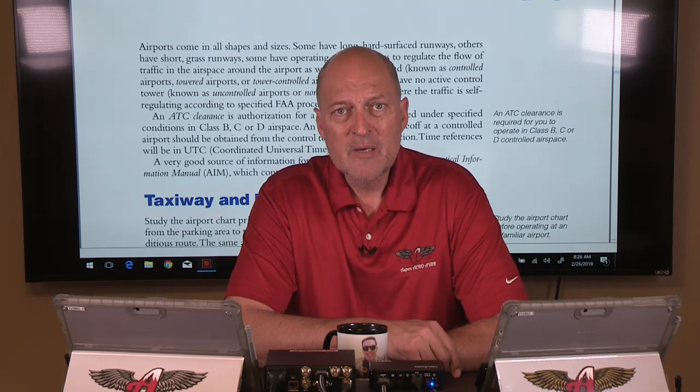Number one, after Friday, I hope you guys believe me when I said it was important to understand this book and to understand what is where. It's kind of the old adage about being an attorney - it's not necessarily what you know, but what you can look up. It's the same thing here: one of the things you're responsible for as a pilot, when flying from one place to another, is being aware of all information having to do with your flight. Parts of that have to do with airports, airport configurations, runways, frequencies, things like this. That's where you get this information in advance, during your planning phase, so that you can make good decisions. That's what this is about - it's about helping you make good decisions.

So you found the definitions part in here, because so many of the definitions and abbreviations are used to make this guide half the size it normally would be if you actually spelled out all the words. That's one of the reasons they abbreviated, to make these a little bit smaller. And you're thinking, okay, smaller - well, that's part of it. So that's one of the things you have to be aware of. In addition, you also have to know the information for each airport, using the legend at the beginning of the book to understand where all of that stuff comes from. So that's the big part of it.

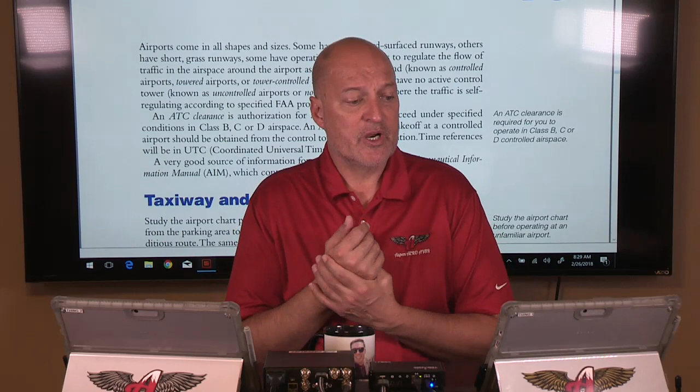Okay, so now then, without further ado, we're going to press into airports and airport operations.

Oh, by the way, your next quiz is going to be over chapters 12 and 13 - that's your next quiz, so just letting you know. Remember, in chapter 12, all of those maps, all of those things at the end of chapter 12 that I told you you were responsible for, all of those text windows inside each one of those little figures and legends you see at the end of chapter 12 - you're going to be responsible for those. Guys, you've just got to go over it, you just have to read it.

There you go. Okay, into airport operations, because at some point the assumption is that you're going to take off from somewhere and land somewhere, and hopefully those somewheres are going to be airports. So there we go. Pardon me whilst I sip.

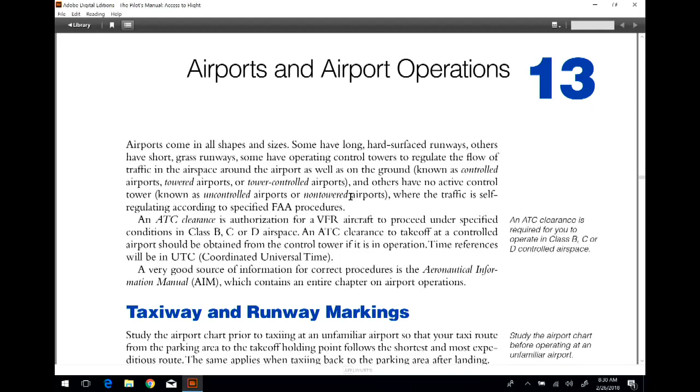So again, as we looked at in the sectional maps, we know that there are towered airports and non-towered airports, shown with different colors on the maps. And you have to understand what those are for, understanding the different types of airspace.

Because you have things like Aspen, which is Class Delta airspace at certain times, and Class Echo airspace at other times, because it says so right there in the chart supplement guide.

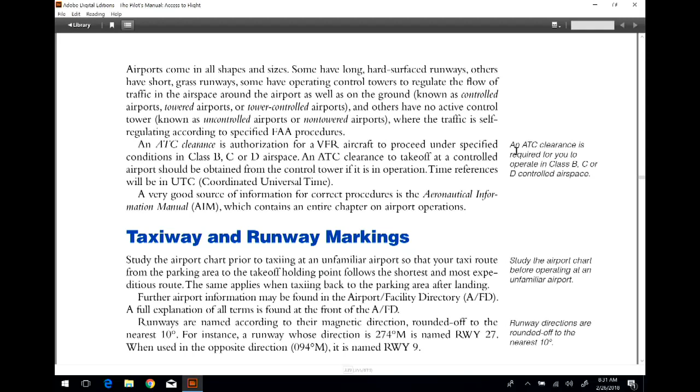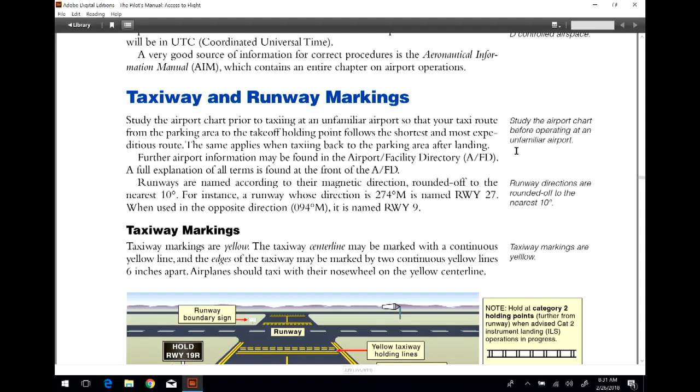We look at these here because now we're starting to look at the airports themselves, taxiways and runway markings. You can see different things going on with regard to taxiways as well as runways. On taxiways, you're going to have yellow lines on the sides, and the lighting you'll find on the edges of taxiways will be blue at night.

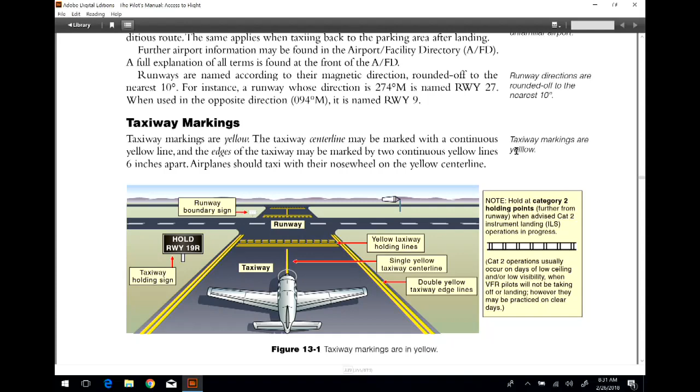All of these markings, all of these things that you see here, you're going to get tested on, because you've got to know what you're looking at with regard to airport operations and driving an airplane around on the ground when you're out there.

This look familiar? If you look right there in front of the FMX, that's called our hold short line. That hold short line requires an airplane to stop every time they're on the solid side of that line. So when you're on the taxiway heading to an active runway, you stop here and get permission to cross.

It's the same way we have in the classroom - that's why those lines are there. You have to have permission to get in the FMX, you've got to have permission to go around the big bald man's desk. So that's why the hold short lines are there on the floor.

When you're coming off the runway and onto a taxiway, you come off the runway and go past the hold short line, and stop again on the solid side of it. The two solid lines, you stop every single time. The only time you wouldn't is if ATC gave you clearance to cross.

One of the things I always do is, if it's not real busy communications-wise, I'll always double check before I cross and just check with ground control to make sure I am cleared to cross that line before crossing a runway. If they give you permission to cross the runway, you can cross it, but I always like to check if it's not real busy on the ground channel.

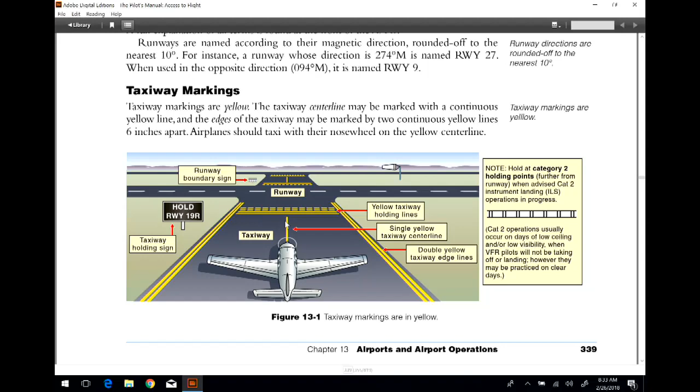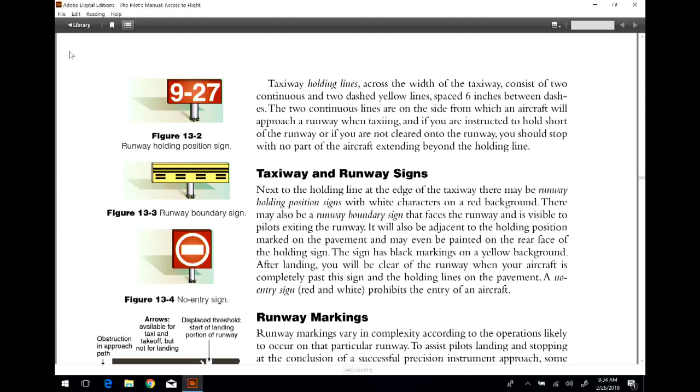And here we also have signs for the runways. A red sign with white numbers indicates that in front of you, you're going to see runway 9 on the left and runway 27 on the right. So if you taxi down to the right and then turn back to your left, you're going to be taking off on runway 27. If you taxi down to your left and get onto the runway there, you're going to be taking off on runway 9. The hold short lines here, that's what those mean.

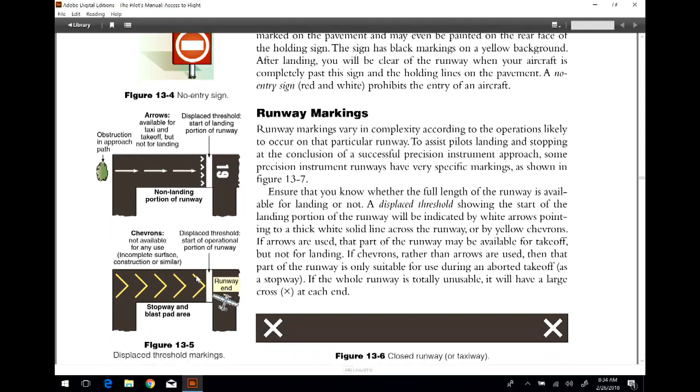No entry signs, pretty self-explanatory. Then in figure 13.5, you'll notice here that you have a displaced threshold. Here you see what is traditionally the beginning of the runway where you see the numbers, but now you see this thing with arrows on it. Well, the reason they'll do a displaced threshold on the runway is...

Let's say there's an obstacle and they want to keep your glide path well above whatever that obstacle may be. So what they'll do is add an area here of displacement that allows you to land while clearing whatever obstruction may be in your path. You can also think of this as the non-landing portion of the runway - they don't want you to land there, but can you use it to taxi and perhaps take off from it? Yes, you can.

So just like in Aspen on runway 33, if you look at your chart supplement guide and the airport diagram, you will see a displaced threshold on runway 33.

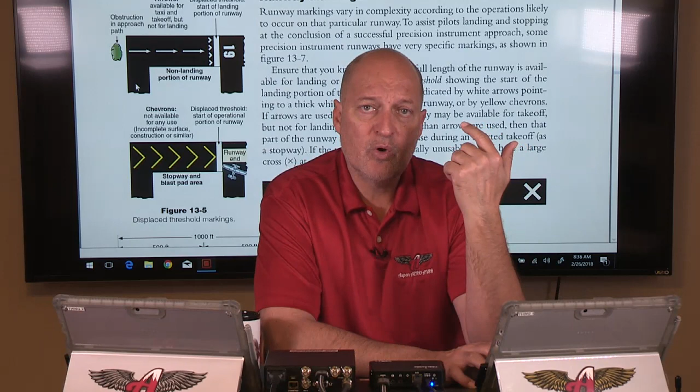Take a look at that on your own, and you can see what we're talking about there with the displaced threshold. It gives you, in essence, almost another 1,000 feet to take off on runway 33, but you can't land on that portion. Coming back the other way on 15, you can also use that extra 1,000 feet as an overrun if you need it. Chances are you won't, because you're going uphill there anyway, but you can if you need it. That's one of the things airports do to keep operational safety in check, but also give you extra room to use as needed. So this is a displaced threshold.

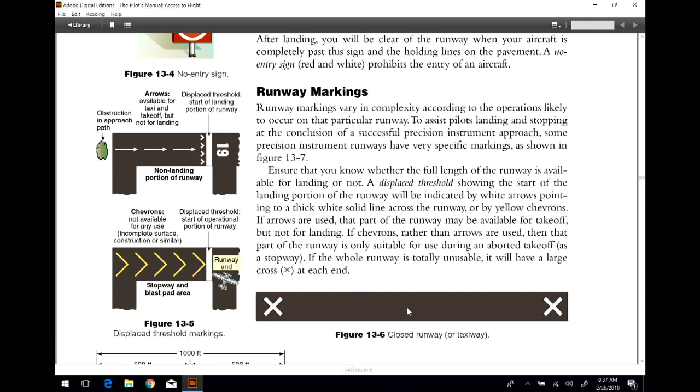Here again on figure 13.5, you'll see these chevrons. A chevron is kind of like a little arrow, but they're full across here, so they're V-shaped things, and they're yellow. There are no operations on the chevrons - nobody uses these except as a blast pad area or safety overrun coming the other direction. The runways here with big X's on them mean they're closed.

Okay, 13.7. This is one of the things you're going to see on most runways that have ILS approaches. A lot of the big commercial airlines will use these markings for the fast movers, the big boys. But we also use these as little guys when we're flying with instruments.

So here we can see the threshold marker - a lot of people call these the piano keys. Then you'll see the runway marked 20 left. That implies there are parallel runways here, because if you have one marked 20 left, the assumption is you also have a 20 right, and you could also have a 20 center. So there could be as many as 3 parallel runways - left, center, right.

Here's the numbers, and they appear in the first 500 feet of the runway. Then at 1,000 feet, this is what they call the aim point marker, or what we refer to as the 1,000-foot markers. The reason we call them that is because they're 1,000 feet away from the threshold markings, the end of the threshold markings of the runway. Cleverly enough, that's why we call them the 1,000-foot markers.

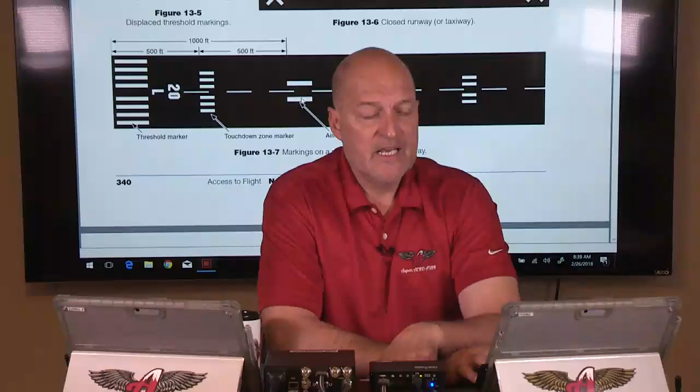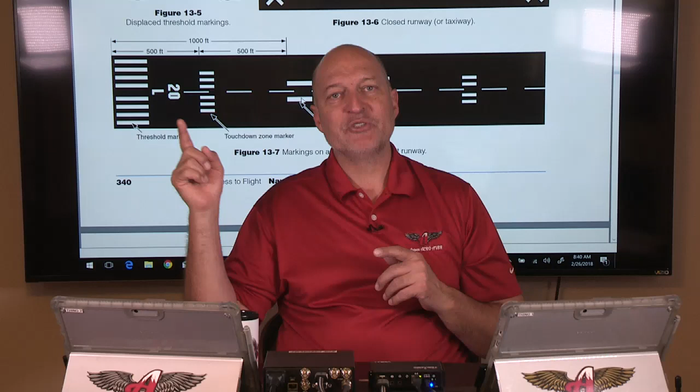One of the things that happens on a transition standpoint is that, for instance, when you're looking at the threshold, a lot of times on VFR stuff you're looking right at the numbers, and your instructors will have you use that as kind of your visual approach when you come in to land. Sometimes it's hard when you're practicing and you go from VFR to instrument stuff to actually take your focus to the 1,000-foot markers as opposed to the numbers, because you start looking at the numbers and coming in to land on them. Well, your VASI and your PAPI will tell you that you're low, because you're coming in at a more shallow glide point than you would have if you'd hit right at these 1,000-foot markers. So that's just letting you know what's going on.

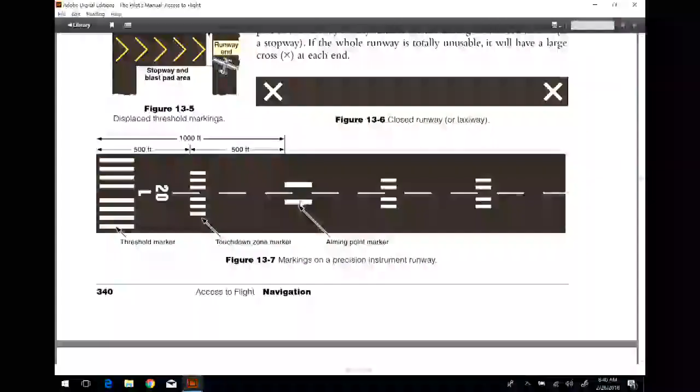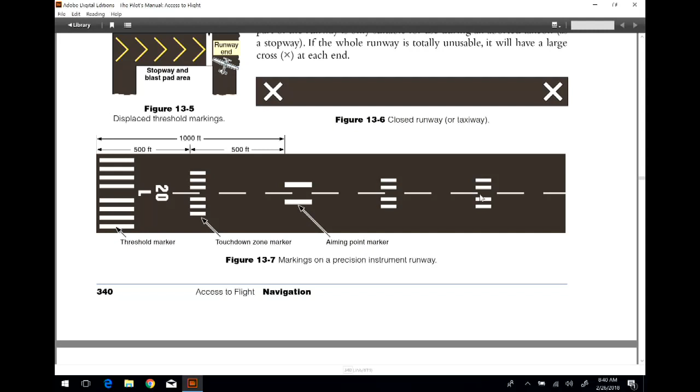You can also see here that you have these other smaller markers every 500 feet - one at 1,000 feet, 1,500 feet, 2,000 feet. And remember, based on your reading, you do need to land within the first third of the runway.

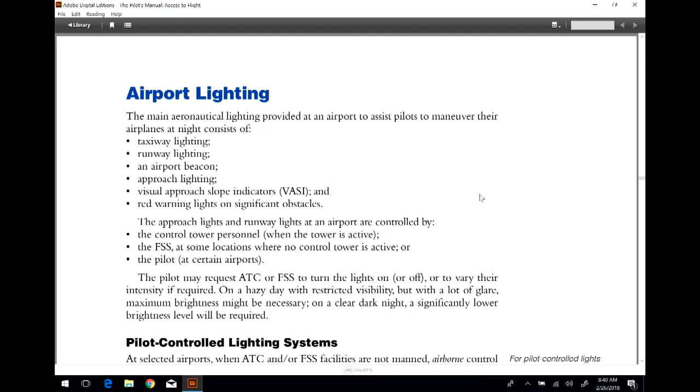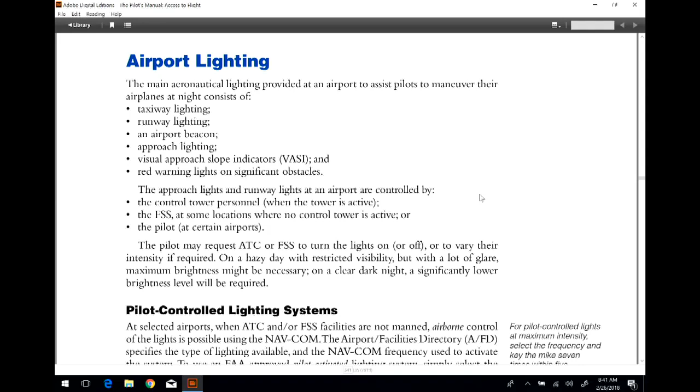Airport lighting - you can look at this here, and one of the reasons we have different colors of lighting is so it can aid pilots in knowing exactly where they are. If you notice you're taxiing between lights that are blue, you're on a taxiway. If you're taxiing between a bunch of lights on the sides of you that are white, you're on the runway.

Pilot controlled lighting. How do we use it? We use that so that at non-towered airports, or airports where the tower closes at a particular time, you can dial up on your radio either the Unicom frequency or the Common Traffic Advisory frequency. It'll tell you in your chart supplement guide what frequency to use.

Keying the mic means pressing the button. When you're on the right frequency, the Common Traffic Advisory frequency, pressing the button 7 times puts the runway lights on the highest illumination setting, so they'll be brightest. 5 times goes to a medium setting, and 3 times goes to a low setting.

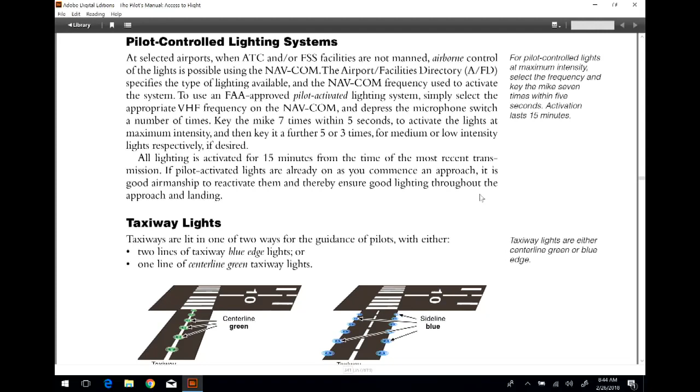Looking here again, you can see the taxiway lights, as I mentioned before — these are going to be blue. The center line of some taxiways can be green.

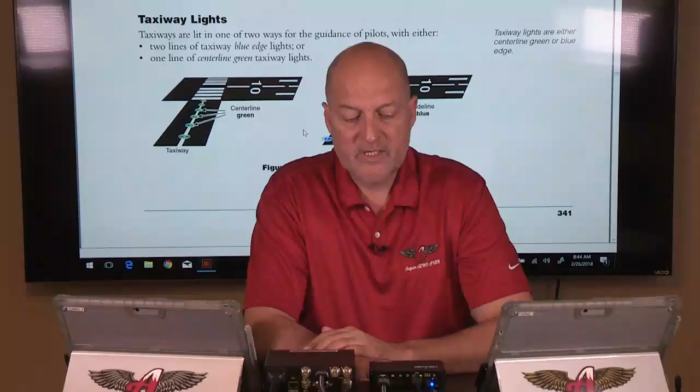One interesting thing, from one of the XED courses we went on a couple years ago to Ohio, is that we actually got to go out onto the airport runway at dark in vans. The Ohio State University was testing an in-ground lighting system. When you're talking on ground control frequency, they can give you progressive taxi instructions, calling your turns and helping you, which is helpful at an unfamiliar airport.

They were experimenting with in-ground LED light panels that show a green light, and the pilot follows this green light off the runway, onto the taxiway, and around to get to where they're going. So they basically use the lights like a follow-the-bouncing-ball system, giving visual progressive taxi instructions instead of just audible ones. It was really cool to see.

At some airports they do something similar to that, so look for that coming up at an airport near you.

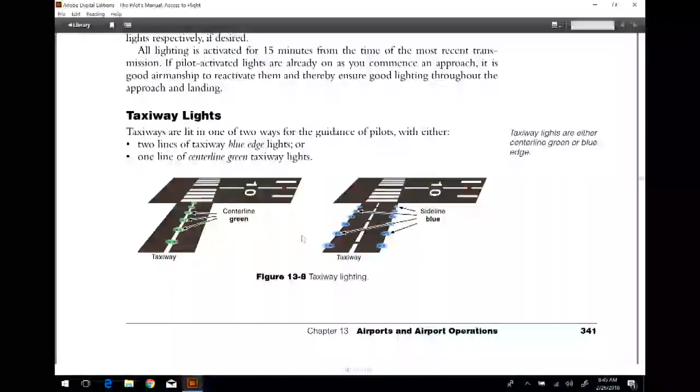We can see here at the threshold, we have the green lights on the approach end. At the departure end over here, you've got the red lights, side white lights there. Runway lighting, you can take a look at this.

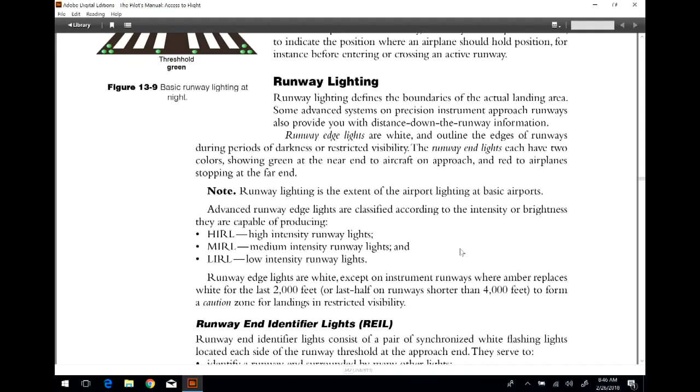HIRL, MIRL, and LIRL, you can also look those up in your chart supplement guides now that you know how to use those. REIL and RAIL, you'll also remember that from your chart supplement guides. Your touchdown zone lighting, remember that we want to be here in that first 3,000 feet in the landing touchdown zone area. Runway center lighting here.

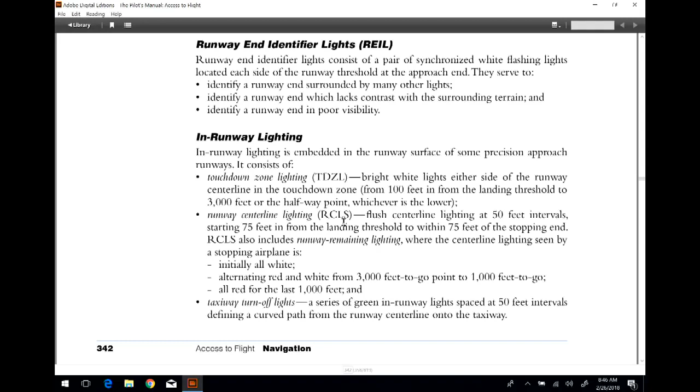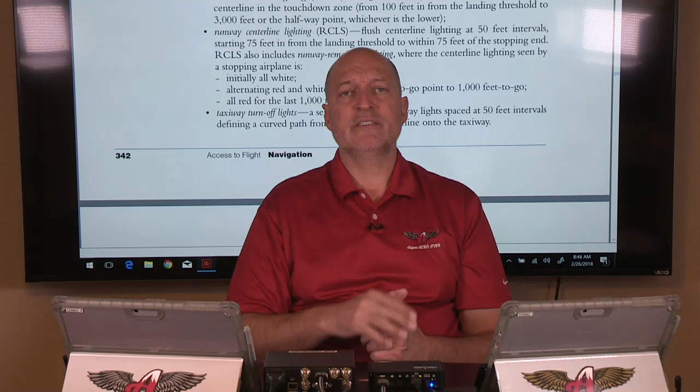One of the things is that when you land at a big airport, for instance, I think of Albuquerque and runway 8 and 26, and it's a big long runway. It's over 13,000 feet long, so it's pretty sizable.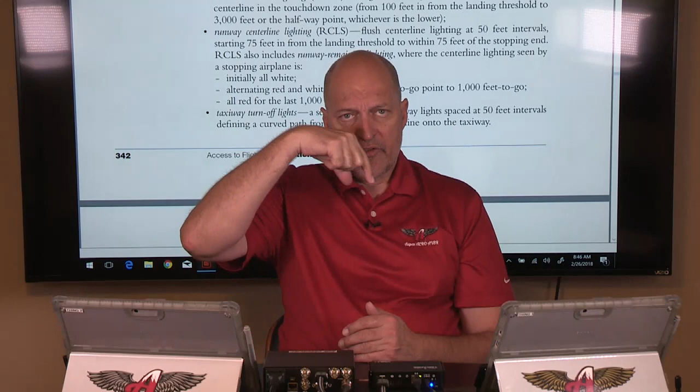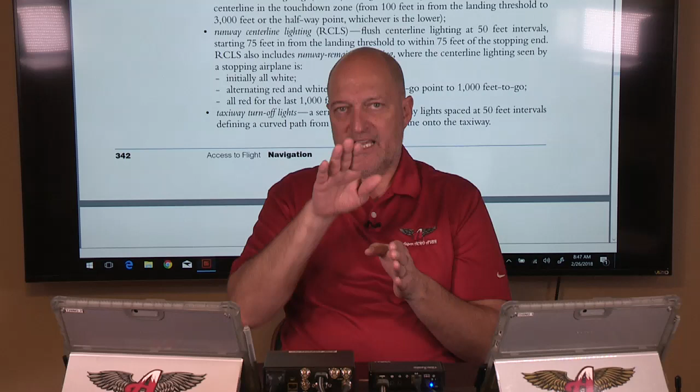As you're coming in and landing there, your center lines are all in-ground lights, but they have this little dome on top of them. You know how we always talk about center line discipline, with your nose wheel on everything? In some cases, that nose wheel can sit there and just absolutely vibrate the living tar out of you. In those cases, you do want to be offset slightly so that you don't keep slapping those light covers on the runway, because that's kind of a rough ride.

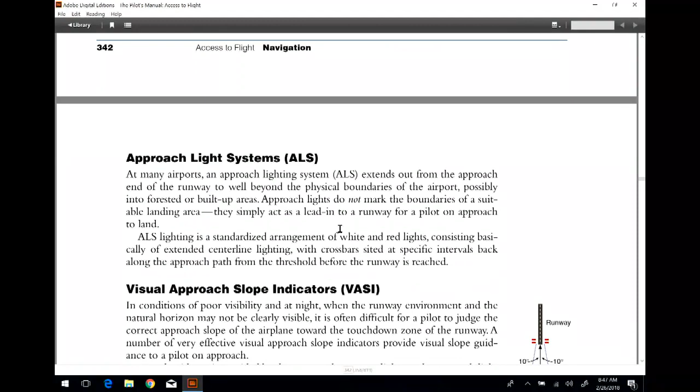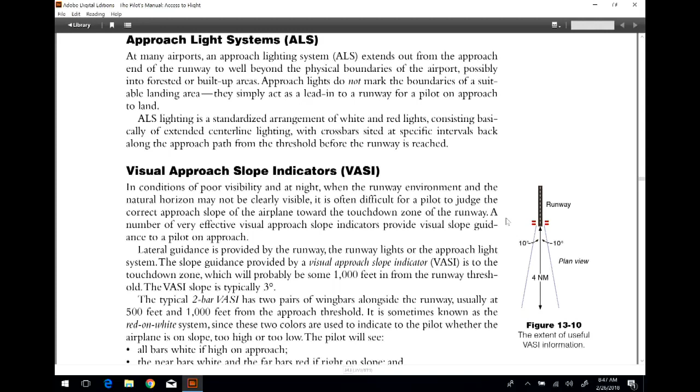Approach lighting systems, ALS. This is kind of what we've talked about here before. The visual approach slope indicators give you two lights, normally on the left side of the runway. In some cases, they could be on both sides of the runway. You can see that not just on the illustration, but also in your chart supplement guide, which will also tell you where those are.

So you have the 2-bar VASI. That's the most common that you'll see at most of the runways until you're at some of the bigger runways. For instance, Aspen is a little different. More about that in a second.

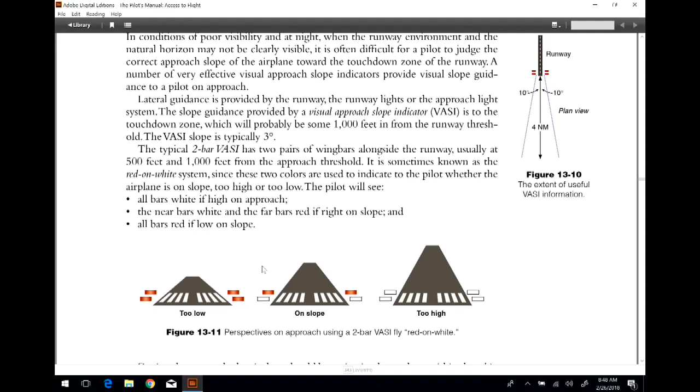So when you're looking at a 2-bar VASI, what you're after is red over white. Here's the way to think about this: white over white, fly all night. That means that you're too high. So when you have two white lights there on a 2-bar VASI, you're too high. When you're on glide slope, you're going to get red over white. You're all right, red over white, you're all right.

Then the red over red, it's a little bit more morose, but the saying that goes along with this is red over red, you might be dead. That means you're low, people, okay? So red over red is not a lighting condition that you want to find yourself in coming into Aspen, because the one thing you do not want to be coming into Aspen is low.

It's better to be high than it is to be low. And when I say high, not excessively, but slightly high on your glide slope is a more favorable condition than to be low in mountainous terrain. So I think we can all understand that.

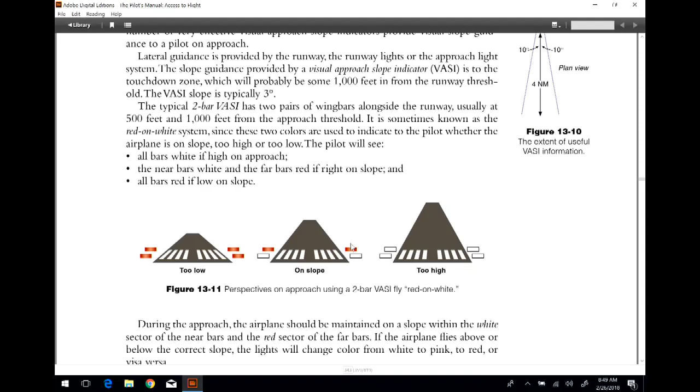So that's how you remember that: white over white, fly all night; red over white, you're all right; red over red, you might be dead. And you can look and see how these are.

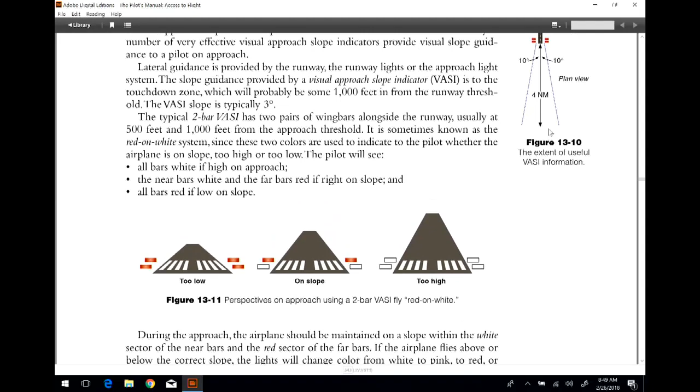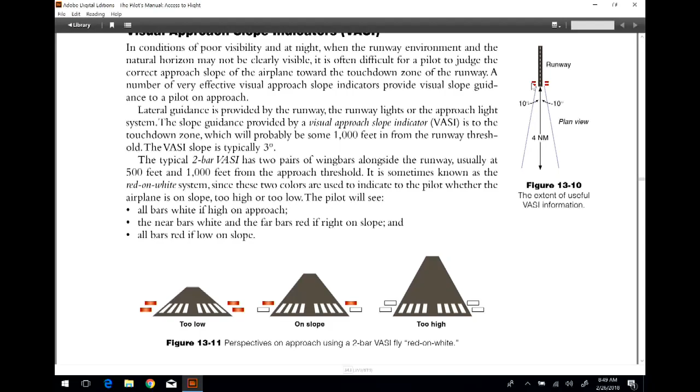One thing too, if you'll notice on figure 13.10, is that you have angles here that you need to be within in order for these lights to work for you. In this case, you have to be within 4 nautical miles of the approach end of this runway, of the threshold, and you have to be within 10 degrees either side of that center line in order to receive useful information from the VASI, because that's kind of how they have these things angled.

In some cases, what they'll do is use the 3-bar VASI, and the reason they use the 3-bar VASI is because when you have bigger airplanes coming in, your airplane may be on the glide slope, but you're sitting a lot higher off the runway because you're in a much bigger airplane. So with the 3-bar VASI, if you're in a smaller airplane and you notice on your chart supplement guide that the airport has a 3-bar VASI, you're going to know it's got 3 bars, and what you're looking for are the bottom 2 lights.

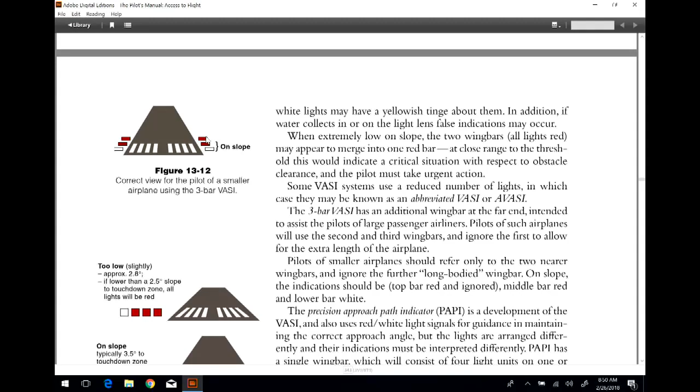Red over white, you're all right. You don't worry about the top one, okay? You're looking at the 2 bottom ones. Now then, here we have the PAPI. So with the PAPI, this is what you see in Aspen when you're approaching on runway 15 in Aspen.

You have 4 lights to the left of the runway, and those lights change color. When you see 3 red and 1 white, that might tell me that I'm a little bit low, just below the glide slope.

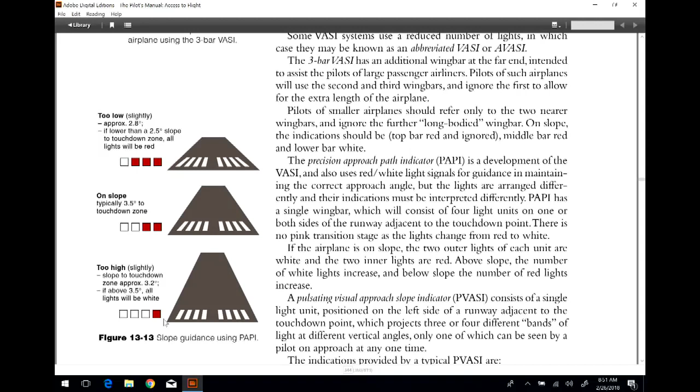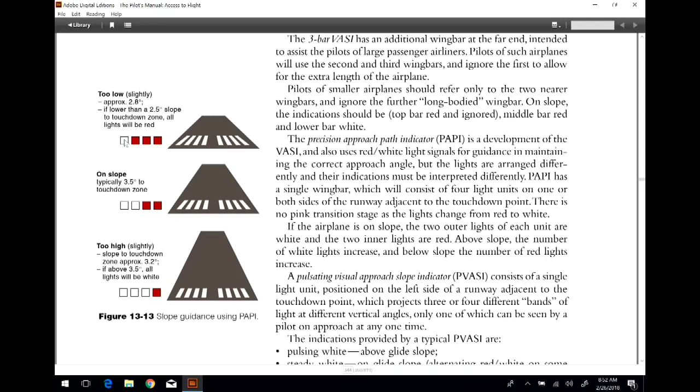2 red, 2 white, I'm all right. If I've got 3 white, I'm a little high. If you see 4 red, you know you're way low, and that's not good. Also, 4 white, you're really high. So on glide slope it's 2 white, 2 red. Just slightly below glide slope, you've got 3 red, 1 white. And slightly above the glide slope, 3 white and 1 red.

You have a pulsating P-VASI here, which is a pulsating VASI. If you have a pulsing white light, you're above the glide slope. Steady white, you're on the glide slope, and in some cases it'll go red and white on some systems. If it's a flashing red, you're below the glide slope.

There's one other thing that happens with these glide slopes, and it also happens with some of the ground-based radio navigation for your glide slope when landing an airplane. If you come at this runway from above the actual path portion of this slope, normally these are set out at about 3 degrees. 3 degrees is going to be the most common glide slope. This is almost a 45 degree glide slope, so it doesn't really look like that.

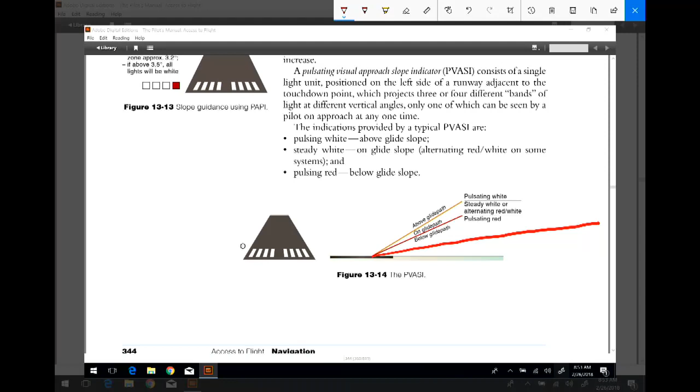Let me go ahead and do this real quick, because really the way it works is that the glide slope itself here at the 1,000-foot markers is going to look more like this. In fact, that may also be a little bit high, but that's really what it looks like. It's not as pronounced as it shows in that guide there.

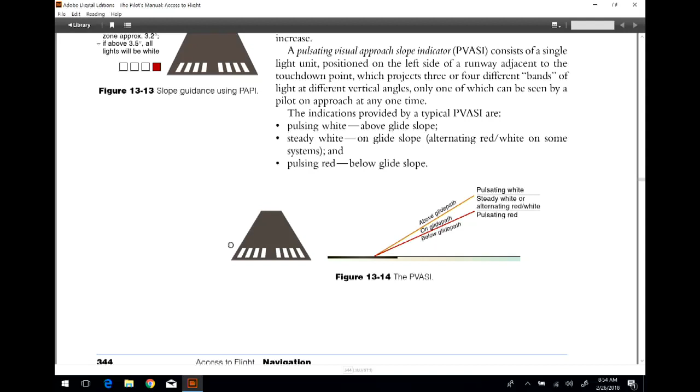But when you approach that glide slope from above, you may get a false visual signal from certain approach lighting systems. Just as you would get a ghost signal if you try to approach your glide slope from above on an instrument landing system, and we'll talk more about that later. So you definitely want to keep your altitudes correct and approach that from below.

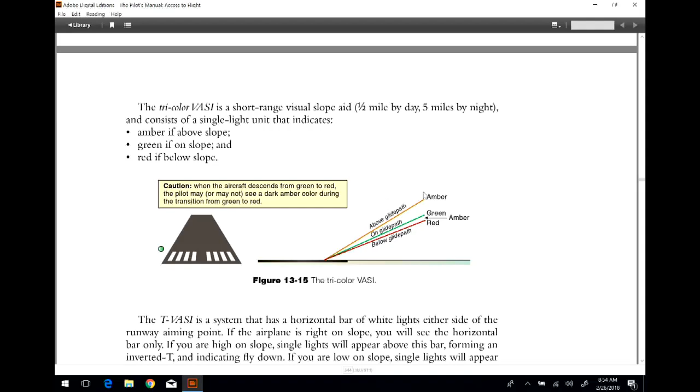This is the tricolor VASI that shows this, and one of the things that can happen is that if you're above that glide slope, where it's supposed to be amber, in some cases it can show green, and that's not good. So you've got to make sure that you're coming in below it.

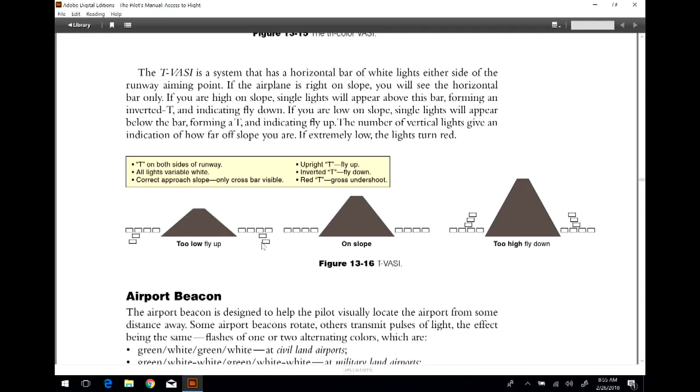Also on these, there's a T-VASI system. With this, they're all white lights. If they're all horizontal, you're good. If you have the bars extending above the horizontal lines, that's telling you that you're above your glide slope. But if the actual lights are below the horizontal, that's telling you that you're below your glide slope. So think of these lights as your airplane: if you're below the horizontal, you're low; if you're above the horizontal, you're high.

Airport beacons. We have all seen airports with flashing beacons, and you can look at this and see what these are. For civil airports, you have alternating green and white flashing lights. For military, you'll have green, white-white, green, white-white. For places where helicopters land, green, white, and green, yellow, white. And at water ports, you'll have white and yellow.

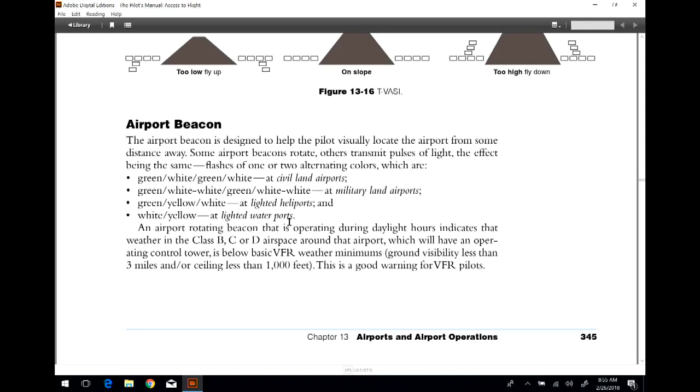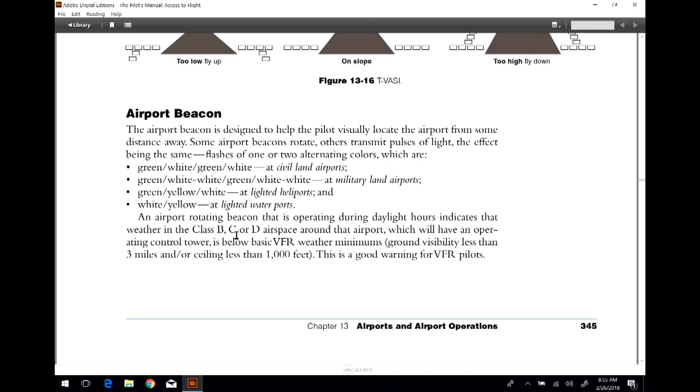The other thing is that if the weather deteriorates below your basic VFR weather minimums, these lights will come on during the daytime as well as at night. Remember, controlled and uncontrolled airports here.

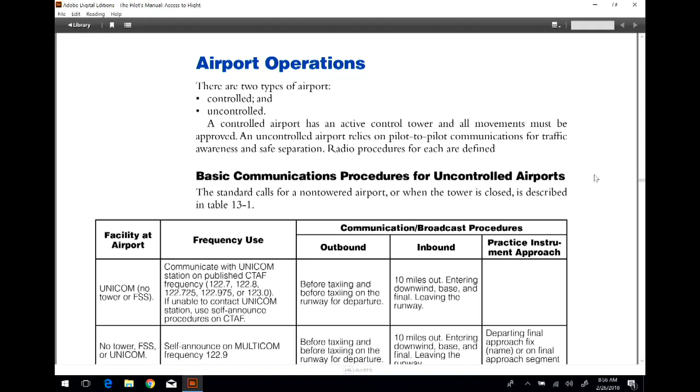Basic communications procedures for uncontrolled airports. This is something you're going to be responsible for, so take a look at this. Understand your procedures for outbound, inbound, and also for practice instrument approaches at these airports. These airports know that practicing approaches is something people do all the time, and it's not just good for the pilots, but also good for the controllers, as it lets both practice their skills.

So, you know, we all work together on that.

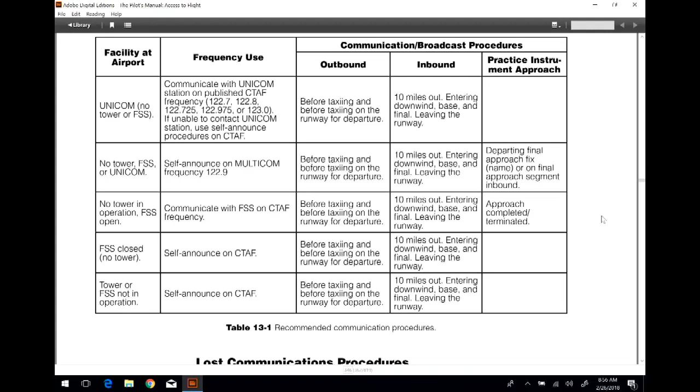But these are going to be the basics here with the recommended communications procedure, and that's right out of the AIM. Lost communications. Transponder.

Transponder is that thing, that's that box inside your airplane that sends a signal to air traffic control. When you're on a flight plan, you'll have a discrete code, and that discrete code may be 4136. And 4136 identifies you and where you are, so that when you're on the screen for the approach people, they can scroll their mouse over there, click 4136, and they can tell that that's you. We know who you are.

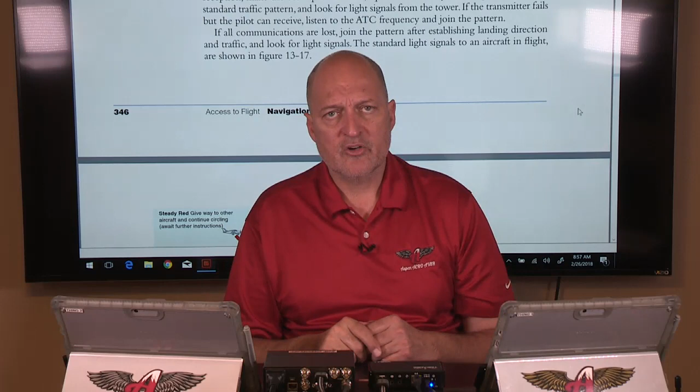But we also have those for the event of emergencies. So you can also, on your transponder, squawk. That's what we call that. We call it a squawk code, because it's basically this electronic thing squawking to the air traffic controller to say who you are, where you are.

7600 tells them that you've lost your communications. 7500 tells them that you have been hijacked. 7700 is an emergency situation that you have. 1200 is VFR. The one transponder code that you never want to enter is 7777.

One of these days, I really want to talk to somebody at the FAA and see if this is still true or not, but that was the military intercept code. 7777 is what they would use when they'd fly drones around for target practice, and that transponder would squawk 7777, and that's how pilots would identify them to shoot them down. So four 7s is not something you want to rotate through on your transponder codes.

On the G1000, you have push buttons that you can actually use to enter the numbers digitally. Back in the day, the transponders used to have codes for the four numbers, and each one would have its own round dial that you could turn to, and they would always tell you never rotate those numbers through where you wind up with 7s across the line there. So you would always want to kind of jockey how you did that if you had 7s in there. Just saying.

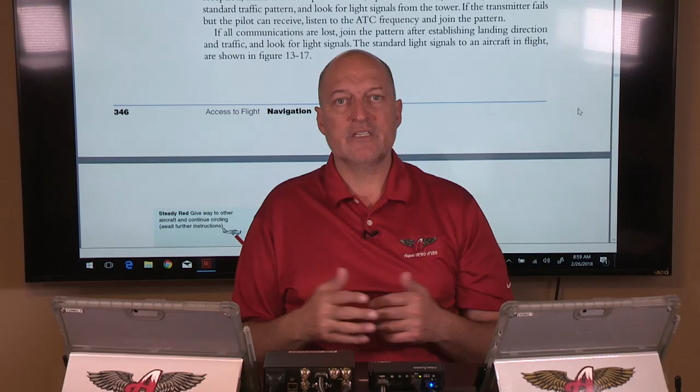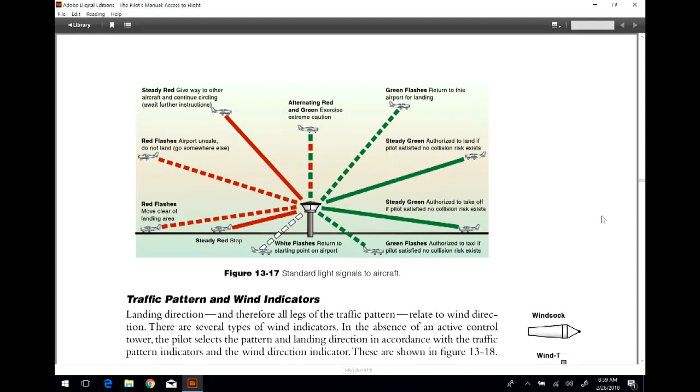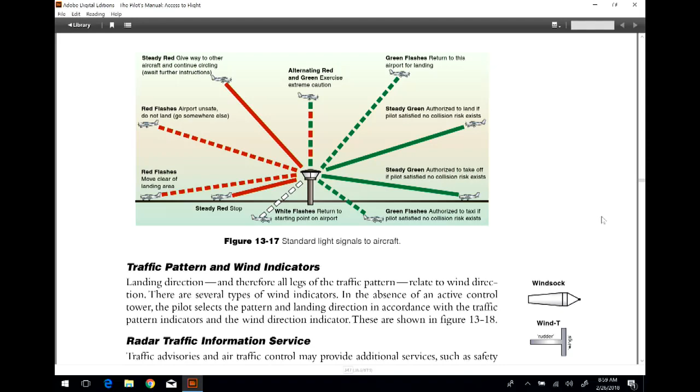Also here, light signals that you have here. These are good, we used to practice these in Albuquerque. The tower kind of liked us doing this as well. You're going to need to know what the standard light signals are, both in the air and on the ground. Each indication of some form of lighting could mean something different depending on whether you are on the ground or in the air, so make sure you understand 13-17.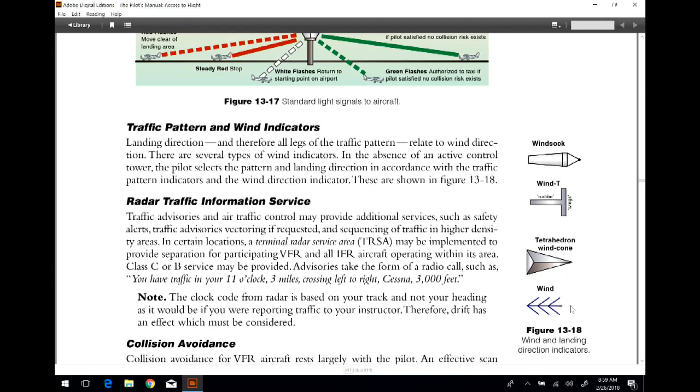Traffic pattern wind indicators: here's the windsock, the wind T, the tetrahedron. We have gone through this. Also notice here that we have the wind barbs that we have here on our wind direction.

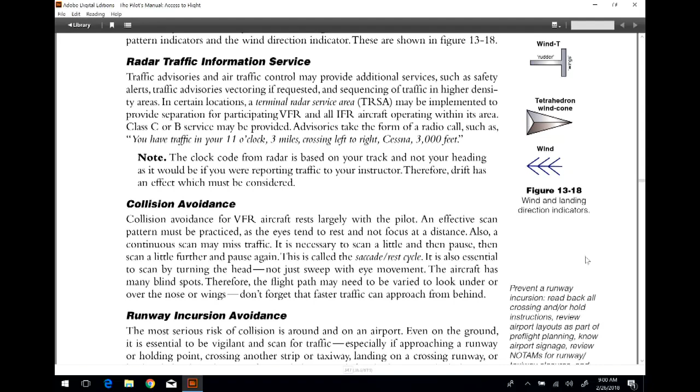Collision avoidance. In VFR conditions, see and avoid - that is really what it's all about. We are all responsible to avoid other traffic.

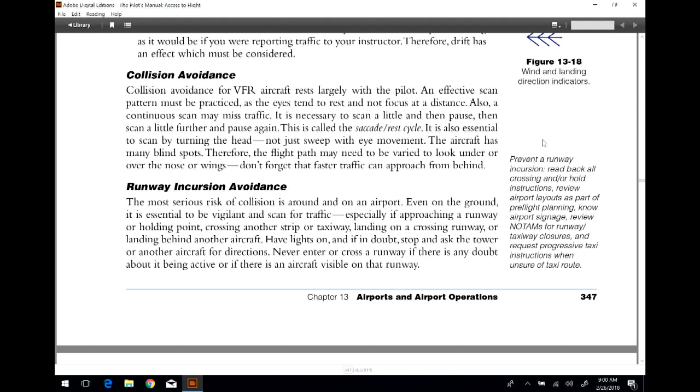Runway incursions. This has been a big deal for the FAA because there really should not be a reason why airplanes run into each other on the ground, but it happens. So we have to always be vigilant anytime that we're actually moving an airplane around with anything there.

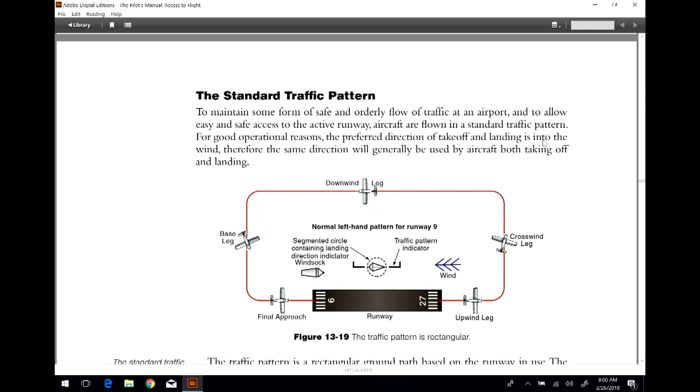Standard traffic pattern, we've talked about this before. This is what it looks like here at 13-19. Right now, what this is looking at is that the big mouth on the windsock is over here, and that means the wind is coming from here. So if we're looking here, this is 9, this is 27. Over here is west, this is north, this is south, this is east. So if you're taking off on runway 9, 090, what direction are you flying? East, that is correct.

So in this case, the wind is out of the east, you're taking off into the wind and you're making left turns. Left turns is standard traffic - turning to the left is standard when you're in the traffic pattern. However, when you're on an instrument hold, the standard turns in a holding pattern are to the right. Makes perfect sense, doesn't it?

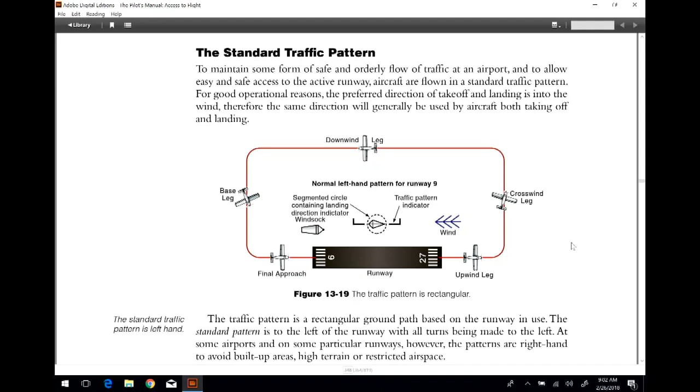So standard traffic patterns are to the left. If your traffic pattern goes to the right for whatever reason, it will be noted in your chart supplement guide. That's where you look to find your traffic patterns and what the normal procedures are for that airport. So that's kind of where you look.

And you can look at this knowing the different legs: you have your upwind leg, crosswind leg, downwind leg, base, and final. This is telling you here also, these bars are telling you that we want you flying over here on the north side of this runway, and in this case, it's going to be left traffic.

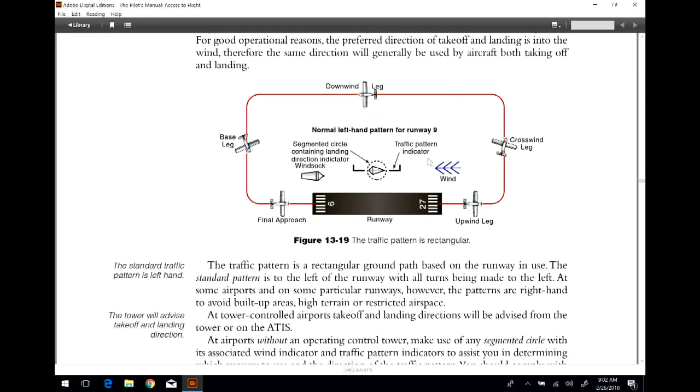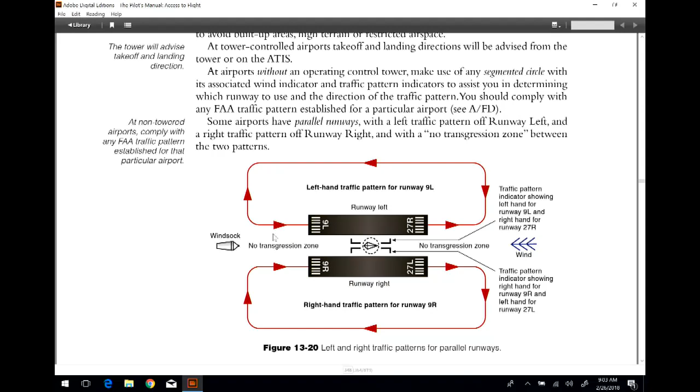The no transgression zone is that area where you absolutely do not want to overshoot your base to final leg coming in to land. Because if you loop around and get into the transgression zone, you may be asked to call an 800 number when you land. Normally the people at the other end of that phone are not real sympathetic when it comes to near midair collisions. So that's something you're going to definitely want to really understand.

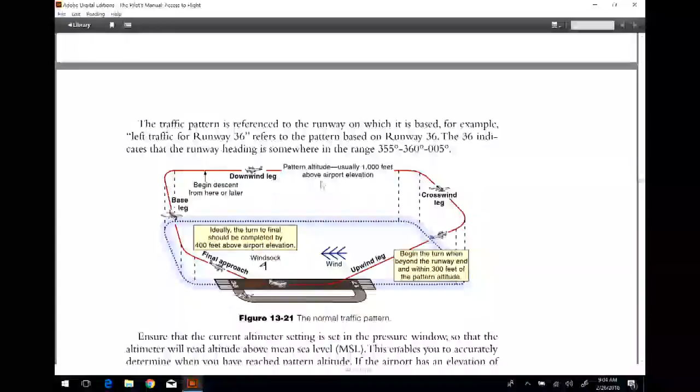This shows a normal traffic pattern again, which we've talked about before. Normal traffic pattern altitude, or TPA, is approximately 1,000 feet AGL, and it varies somewhat. In Aspen, we're like 1,200 feet AGL. Key West, Florida is 800 feet AGL. So it varies a little bit. Where do you find that information? The Chart Supplement guide. That's kind of what that looks like.

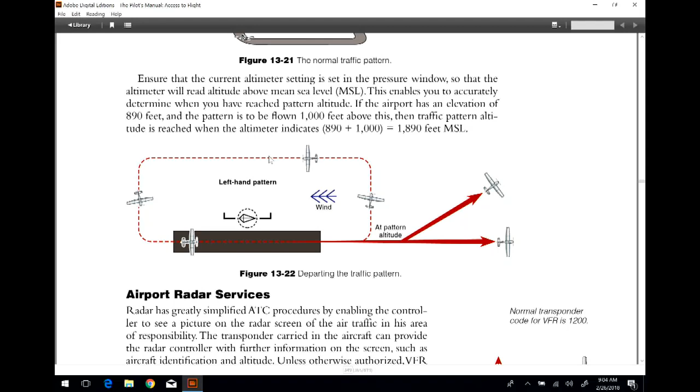Again, with the left-handed pattern, departing the pattern, you can have a straight-out departure on your upwind leg. You can depart at a 45-degree angle on your upwind leg as soon as you're out of the pattern. In some cases, you can depart from your downwind leg if you need to go the other direction. You call it and tell them what you're doing.

I talked about normal VFR here, 1200 on your transponder, so you're squawking VFR. Remember also how they call your traffic. They may call your traffic at 2 o'clock because you're holding a ground track that may be north, but you're having to turn the airplane a little to the left to hold that ground track. Air traffic control cannot tell the heading of your airplane; the only thing it can tell is your course. It paints your course along the ground, so they look at your course line. They don't know what your heading is based on the wind. So if they see your course and say traffic at 2 o'clock, you don't want to look at your 2 o'clock. You would think, what's 2 o'clock to my course line? Because your actual 2 o'clock may be somewhere behind you based on your wind correction angle. Okay, so there's that.

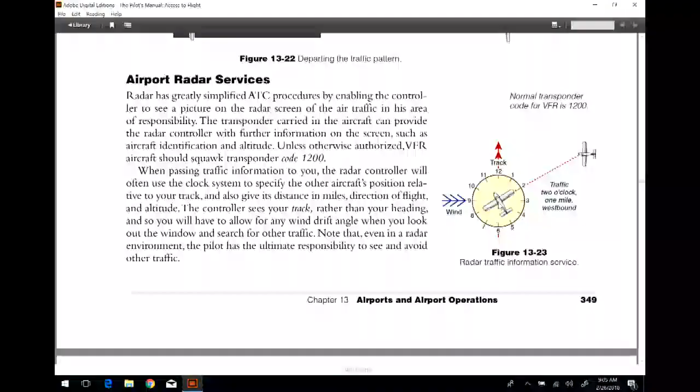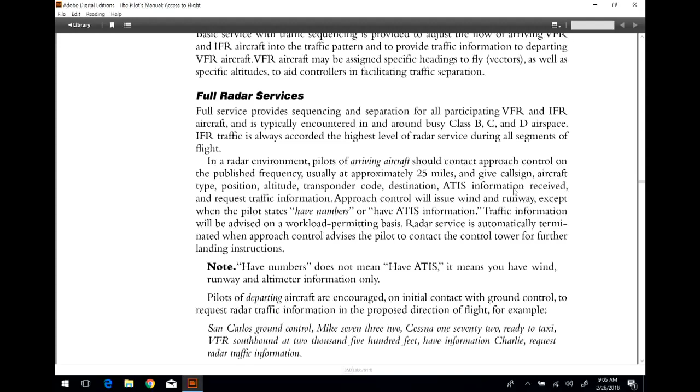And then we get into the basic radar services. So for tomorrow, I want you guys to finish reading chapter 13 - and oh, there it is, that's the end of chapter 13. So there we are, one last thing I'll say here.

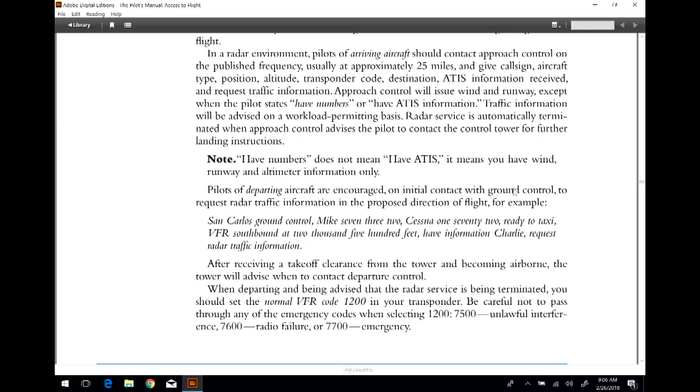There's a note here talking about ATIS. Remember we talked about the Automatic Terminal Information Service, which gives you not just weather information but operational information. They do this at towered airports, and they label each broadcast - we went over this with METARs - at some point they'll call one Bravo. Please advise on initial contact that you have information Bravo. The next hour you could have information Charlie, and the next hour it could be information Delta. So they change that every hour.

It used to be back in the day that you could call them up and say, I have the numbers. They don't like that anymore, because they don't know what numbers you have. You need to tell them which broadcast you just listened to, because it may be old news - you have to tell them with information Charlie. Even when you're getting ready to taxi, you talk to ground on 121.9 in Aspen, and let them know: Aspen ground, Diamond Star 141 Hotel Lima, the North Tie Down area, ready to taxi with information Whiskey, or whatever it's going to be. They want to know that you know the current altimeter settings, wind settings, and any other operational information for that airport. So you can't just say you have the numbers - that doesn't cut it anymore. You've got to be more specific, okay?